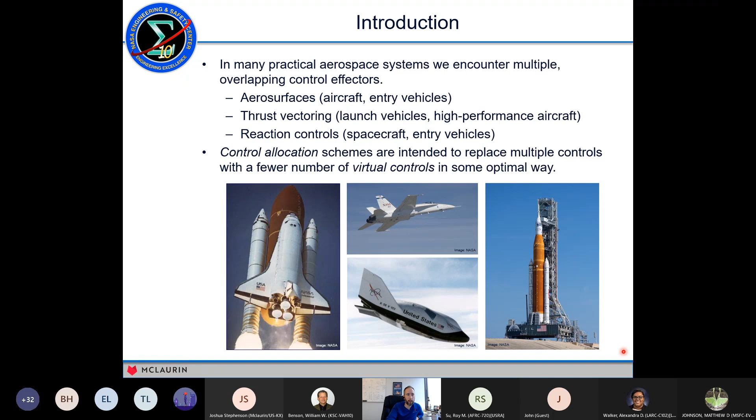Okay, so I think everyone should be ready and brace yourselves for a little bit of mathematics here. Part of the intent of this talk is to focus on the underlying mathematics, not necessarily the algorithmic formulations and how you solve these optimization problems, but more how the problems are structured and what they are from a mathematics and geometry and topology standpoint. So let's talk about, in a simplified way, what are we trying to do?

Okay, so if we represent the vehicle dynamics as some basic nonlinear, non-autonomous set of differential equations, and there's some state vector and some output vector, we'll assume for the purposes of this example that the state vector and the output vector are the same size. And a lot of the problems we'll look at for aircraft, I'll linearize the aircraft dynamics or linearize the rocket dynamics. That's pretty typical. So the structure of the problem and the control design part of the problem in terms of stability theory and control law synthesis is really not what we're too interested in here. So what F contains, what H contains are not that important.

Really, what we're going to boil this down to is a linear algebra problem. And then once we've solved the control allocation problem, that simplifies the design for the subsequent control design problem. And the control design problem is not what will be in the scope of the discussion today.

So if we just simplify this system down to some either linearization or perturbations around some nominal point, some nominal control position, we can linearize the sensitivity of the system dynamics with respect to changes in the input variable. The input variable here is u, and this u is just a vector of dimension m that will contain the control deflections. All right, so we are restricting the problem here to situations where the response of the dynamical system to the control changes is linear in those changes.

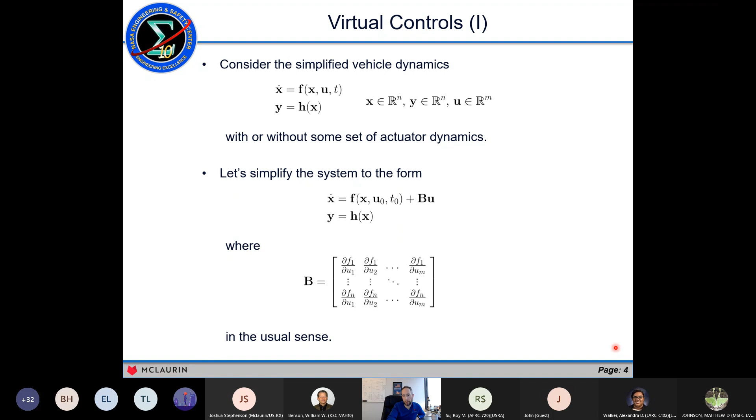But to introduce the basic geometry and the restrictions on the problem, we'll just assume that the system is linear in the controls. All right, so this is kind of the B matrix that you see in the usual sense if you have an x dot equals Ax plus Bu, as you would in a typical linear control synthesis problem. Okay. All right, so we're going to call that the input sensitivity matrix, or it's just a matrix of partial derivatives of the response of the state derivatives with respect to changes in the input.

Right. So what that does is we can think about it as a linear map. It's a linear transformation. It maps the actual controls u onto some controlled degrees of freedom. Those controlled degrees of freedom could be the angular accelerations. They could be both lateral and angular accelerations, or they could be some other intermediate control variables. What variables those are is not that important. The key is that B is typically not square.

All right, so in a typical, say, aircraft or spacecraft control problem or rocket control problem, the number of control degrees of freedom given by N is typically 2 or 3, like pitch, yaw, and roll. And M is the number of degrees of freedom of the effectors. All right, so in order to proceed with the synthesis technique, whatever technique we're using for control design, we want to replace Bu with some virtual control. We'll call it V. And I'll try not to abuse the notation too much.

There's been some changes in notation from the aircraft world to the thrust vector world and so on. But generally what we'll have is the control deflections or the control input vector is going to be called U, and the virtual control will be called V. All right, and what we're doing here is essentially squaring up the system. Now, for those with a controls background, you'll see here that I don't have a direct feedthrough term here, meaning the relative degree of the system is at least 1.

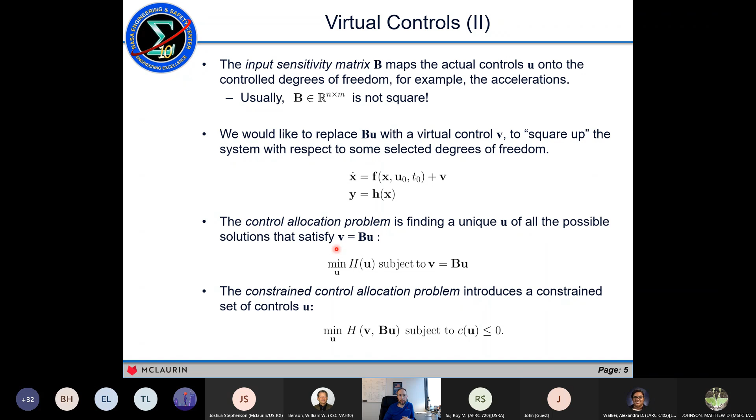Okay, so really when we look at the unconstrained problem, this is just a linear inverse problem. It is a simple linear algebra problem. Now, it turns out that because of the constraints, it becomes a relatively complex problem with a lot of caveats and implications of different solution methods, and it has yielded a really rich literature.

Okay, so why do we do control allocation rather than broad MIMO synthesis in the controls world? Well, it eliminates redundant degrees of freedom. It simplifies our design problem considerably. So while we could use MIMO techniques, if we have a system that has particularly complicated structural dynamics, for example, it is then still possible to look at single loop stability criteria using the Nyquist criterion. So we can still apply all of those linear stability techniques that are very common for flight certification.

A lot of practical and classical control laws break the system into 3 degrees of freedom, like roll, pitch, and yaw, that are either uncoupled or have some limited cross coupling, like roll-yaw interconnects. And also, as I mentioned earlier, it would not be reasonable if you have an agile fighter aircraft, for example, with 16 control effectors, to put 16 control inceptors in the cockpit. Pilots are used to operating on 3 degrees of freedom, so we have to have some way to map those 3 degrees of freedom into optimal combinations of the individual control effectors, whatever those optimal combinations are.

All right. So as I mentioned, it's straightforward to solve this problem if the moments or accelerations, the virtual controls, are linear in the control deflections, and the controls are unconstrained. And even if they are constrained, if the constraints are geometrically simple, okay, so a very simple constraint function, and I'll get into the geometry of this in just a minute, is just that the absolute deflection of the controls cannot exceed some value.

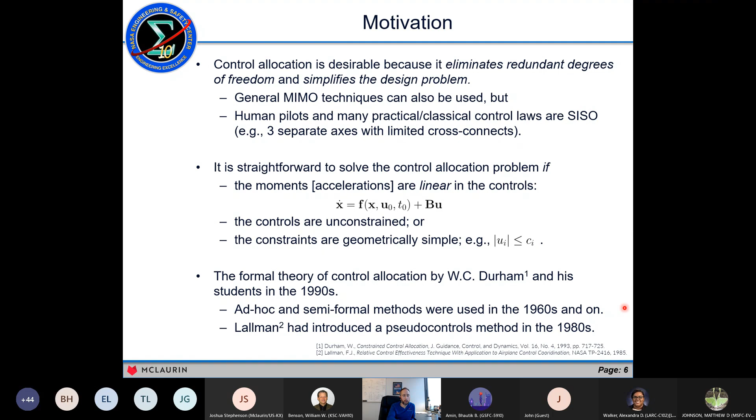All right, so if we get a little bit out of the very general dynamical system description that we used earlier, and say we have just linear perturbations from some operating condition, an angular rate, dynamic pressure, Mach number, alpha, beta, and some control positions. And in the HARV example, the B matrix maps control deflections into normalized aero coefficients. Right, so these are your CM, CY type aero coefficients, and then we can go look at what this looks like geometrically.

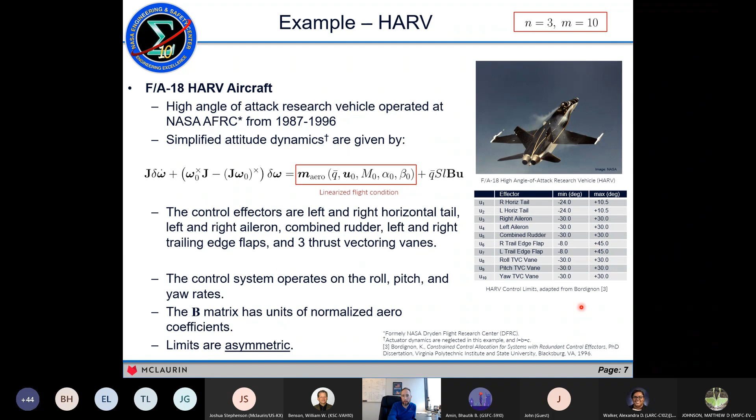Now, the way this was actually implemented in the LM flight software was with a whole set of different firing tables based on different failure conditions and jet select modes and so on. But for the purposes of discussion, we can solve this problem using a control allocation technique. So we'll use that as an example here in just a few minutes. All right, NASA SLS, which I'm proud to say we flew these algorithms just a few weeks ago, November 16th.

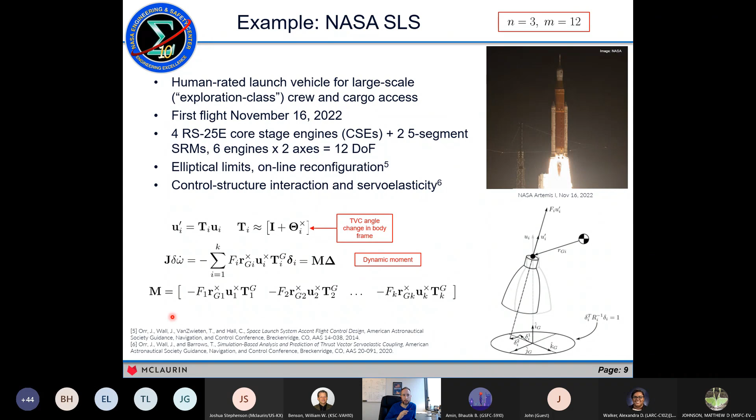What we'll end up doing is inverting M, this matrix, which maps the effector, the TVC deflections, into torques. We'll invert J, the inertia tensor, we'll pre-multiply by M, and we'll end up with the same matrix B. So if we write M, we're typically talking about torques, and if we write B, we're talking about angular accelerations. But again, that's just a particular structure of the problem. All of these techniques apply for arbitrary pseudo controls, whether we're talking about rockets or spacecraft or UAS, quadcopters. It's the same theory underlying.

All right, so what is control allocation algorithmically? Given a desired virtual control, we need to find a U that's optimal. I introduced this just a minute ago. So this is the unconstrained problem. So it does simplify the design problem. There's usually 3 controlled degrees of freedom. And if the solution is unconstrained, there's always a solution for an arbitrary V if B is full rank.

Okay, so if B can generate moments in any direction, all of its column vectors, some will be linearly dependent, but if we have a minimum of 3 independent column vectors, then I can always generate moments in any direction. Cases for which that's not true, we call a degenerate geometry or a degenerate control allocation matrix. And there are ways to deal with that. And those can happen, for example, if you lose control effectors. But we won't address that in detail here. Again, that solution is not unique.

All right, so what does it look like from an autopilot standpoint? I have what would be typically called a plant model, which is my controlled system. I have some vehicle dynamics in here. I have a sensor that senses some controlled degrees of freedom. In this example, it's just angular rates. So this is like a rate feedback autopilot.

And I have a whole bunch of actuators. So I'm not ignoring the actuator dynamics. These are very much in here and they're very much part of the analysis. But what my control law does is it generates a requested, say, angular acceleration. And then it's up to my control allocator to decide how to convert that into actuator commands that will achieve that angular acceleration in some optimal way.

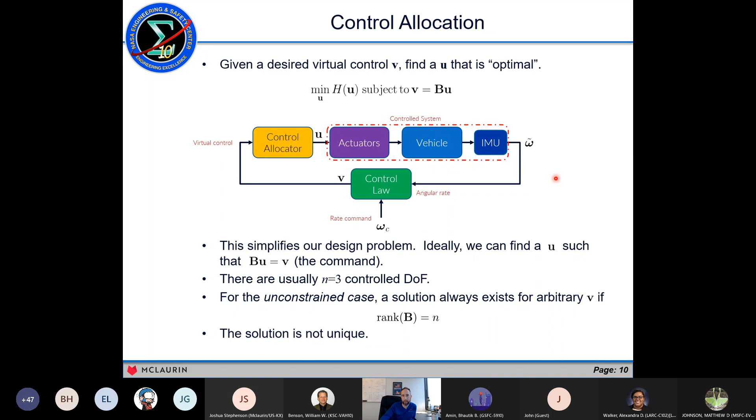All right, so the most common way to go about this problem is using what's called a pseudo-inverse solution. This is kind of the intuitive way. It's not always the best way, but it's very common for a variety of reasons. If the set of controls is unconstrained, we can use a pseudo-inverse. This is a linear least squares solution. It does not have any knowledge of the constraints.

Now, is this a good idea? Is this necessarily the only answer? No, because there are many more things that I need to be concerned about with U to make sure that I don't just get the command I asked for, but I also do that in some optimal way.

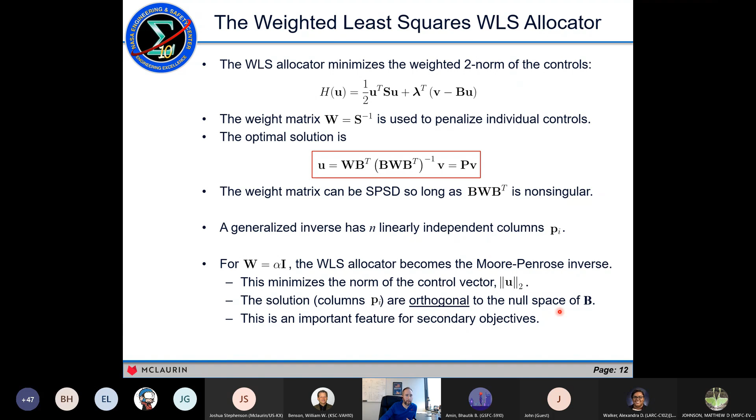But the thing to keep in mind is that in that case, and only in that case, the columns of the allocator, meaning what are the directions in the control space that are allocated, are orthogonal to the null space of B. And that means they don't generate any internal loads. All right, that's an important feature, and we'll talk in just a second about what that means.

One great way to look at that, this is for a very simple case. This is a Titan II GLV, which has 3 controlled degrees of freedom, but 4 actuator degrees of freedom. We can actually visualize exactly what those control vectors are. So if we just do a straight pseudo-inverse solution, what we will find is that we get 3 column vectors in that pseudo-inverse. 1 corresponding to differential motion of the engines for roll, 1 corresponding to symmetric pitch motion of the engines for pitch, 1 corresponding to symmetric yaw motion of the engines for yaw.

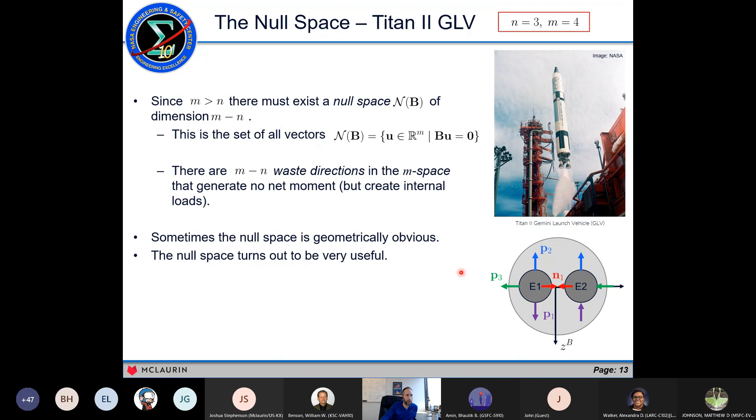Now there is a fourth direction in this space of dimension 4 that is in the null space of the B matrix, and it is inboard outboard motion of the engines. So in terms of mapping into angular accelerations, if I deflect the engines inboard or outboard towards one another, I don't generate any net moment. And that is a solution where B times U for any scalar multiple of that vector is equal to 0. That's the definition of the null space. Now it turns out the null space is pretty useful.

All right, so there's always 2M inequalities, and this forms a thing that is called a polytope. Now it's convex, it's closed and bounded, and the neat thing about linear transformations is if I have a closed and bounded convex set in a space of dimension M, and I multiply it by B, or it's transformed by B, it maps into a closed and bounded convex set in an n-dimensional space, and that's the, say, 3-dimensional space of angular accelerations.

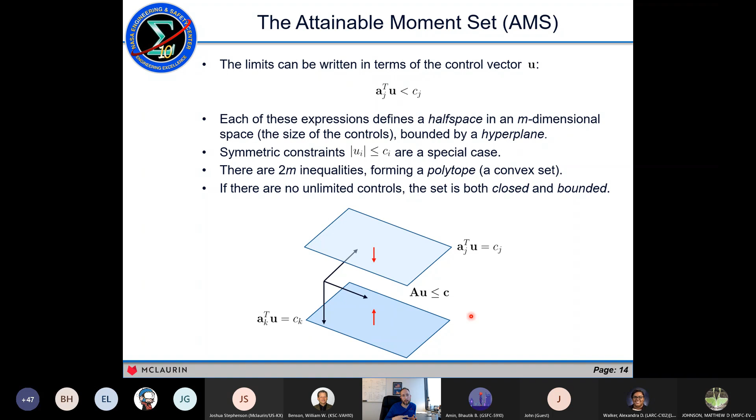All right, so the set of all possible controls generally we refer to as omega, and this is an example with a linear inequality constraint, just AU less than or equal to C. It's called the admissible set. It's the set of all possible controls. It has an image in 3-dimensional space or n-dimensional space that is preserved. This boundary is preserved. Some of it is projected inside, but some of it gets projected into this exterior boundary.

Okay, this set is called the attainable moment set, and this is very important in control allocation theory. It represents the extents of what a given set of controls can do subject to the constraints. That is a theoretical upper bound. And a very important relationship from control allocation theory is that it's actually very difficult to achieve all this. Using most simple algorithms, you can usually only get part of it. You can't get all of it.

But the idea is that any point in or on this boundary, this is say in angular acceleration, there must be theoretically some point over here that satisfies the constraints and generates that moment. Now, whether I can get it online with an algorithm is a different issue.

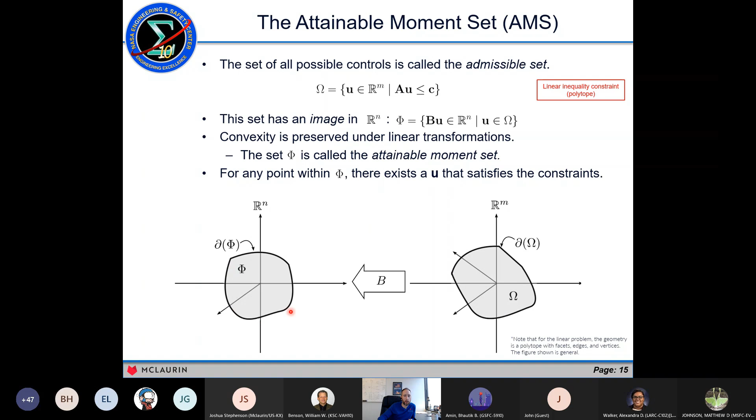It turns out that it can be recast as a linear program and solved online using a simplex algorithm. Simplex is a very simple algorithmic technique used to solve LPs. It works very well. It's one of the only algorithms that guarantees that you can access all of the theoretical capability. Unfortunately, it's not very efficient because it turns out that most of this boundary is intersected with the null space. So while you can achieve the exterior limits of the attainable moment set, you're actually wasting a lot of control power in its interior, which is not necessarily efficient.

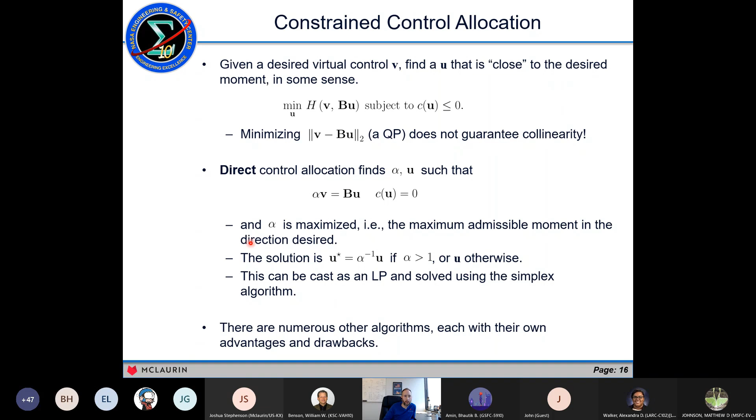There are many other algorithms for doing this. They all have their own advantages and drawbacks, and unfortunately, we don't have time today to go into a lot of them. All right, so why not just use weighted least squares for everything? Okay, this is a key result in control allocation theory. It's universal, it's very important, and it's very counterintuitive. It was originally proved in the early 1990s by Durham. A generalized inverse cannot access all of the moments.

So if I look at, say, what is the control capability of a set of vectored engines, and I map that over here, I look at the image of the attainable moment. So what is the angular acceleration contribution of each of these guys? And I map them into 3-dimensional space, I will get this thing called the attainable moment set, which is the total capability. If I then use any linear inverse to allocate those controls, I'm confined to what is called a proper subset. So there will always be part of this space in 3-dimensional space that I cannot access without changing the direction in a nonlinear way.

So a linear control allocator or a pseudo-inverse solution has many advantages in terms of things like structural loads and being able to control the null space and things like that. But there's always part of the system that I cannot access.

This is very important. This example over here on the right is a trivial example that I constructed where the B matrix is basically just a couple of ones, and it's 3 controls into 2 objectives. So we're mapping a 3-dimensional cube with limits plus and minus 1 onto a plane. And as you can see, if you look at what the pseudo-inverse does and just kind of turn your head just right, you can see this is actually just a projection of a 3D cube into a 2D space.

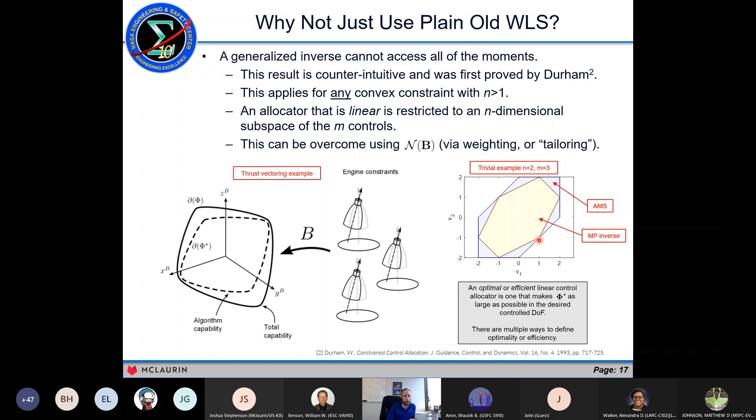theoretically available. All right, so here's an example using the classic HARV case. Okay, linearization. This is right out of one of the most popular control allocation examples in the literature. 10,000 feet, Mach 0.3, relatively high alpha, no side slip. So everything's nice and symmetric down the longitudinal plane. This is the moment matrix. It's a 3x10 matrix.

And if we apply these limits and we look at what the shape of the attainable moment set is, you see it has this nice symmetric shape. All right. If we use a straight Moore-Penrose inverse, we only access 13% of the total volume.

So even getting deep into the theory, a takeaway even at the system engineering level is if the design doesn't close, the first question to ask is, are the controls being allocated effectively? Because sometimes ganging approaches or pseudo controls approaches are very simple, Moore-Penrose inverse, least squares. This is not readily apparent unless you go do the analysis. And so sometimes there's hidden capability in the system that can be eked out using nonlinear approaches.

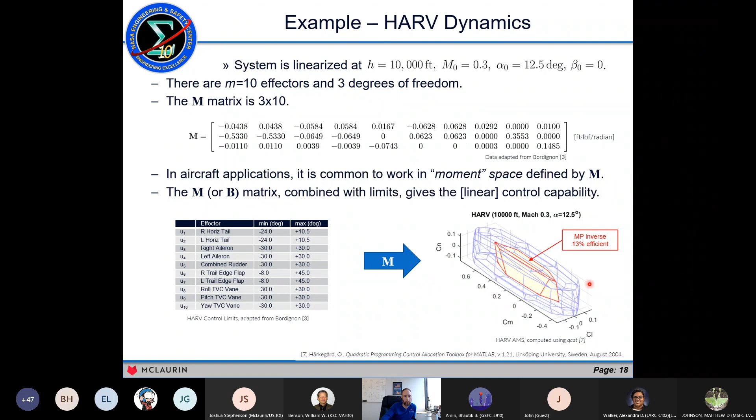All right, let's look at what this looks like in a spacecraft situation. This is, again, the Apollo LM, a very specific configuration for which I have data. It's Apollo 12 pre-PDI. So usually the way we can handle control allocation for RCS is, since we're confined to just turning the jet on and off, we actually convert this to a problem in time. And we use exactly the same algorithm, same mathematics to solve for this in time.

So we just multiply the angular acceleration by some base frame rate. In the case of the production LM, this was 100 milliseconds, autopilot executing at 10 hertz. And so now we convert the problem from an angular acceleration problem into a rate increment problem. So we have, from the autopilot or from the pilot interface, a commanded rate increment. Over here on the right-hand side, we have the jet location, the nominal jet force, and the jet unit vector A. And the control vector then becomes a vector of on times.

And so at each minor frame cycle, we then send delta on time commands to a jet controller, which will provide a pulse of the desired on time to each jet. And there are various ways to handle the minimum on time issue. If the jet firing command is below the minimum on time, we may not fire at all. We may scale the times to account for the fact that at very low on-time commands, the jet response is not a pulse, not a square wave.

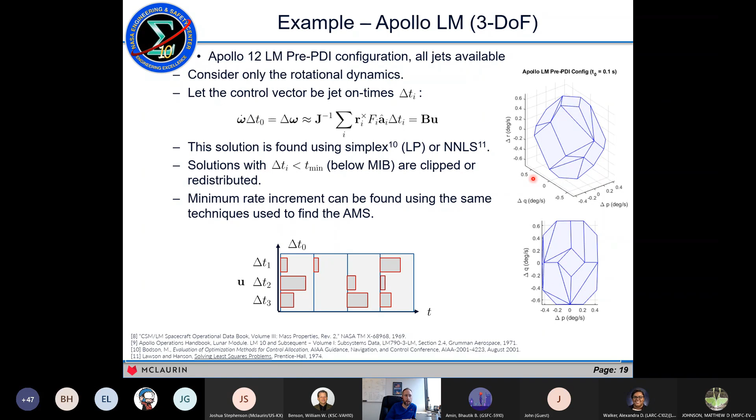The same techniques can be applied for certain selections of jets to determine what the minimum rate increment is, and that helps for jet sizing. So if you were to imagine that being plotted, it would be a very small minimum increment here in the interior of this domain. And that helps us do things like size what the limit cycle amplitude is going to be with a given jet size.

Okay, last example, space launch system. Space launch system used a relatively sophisticated online weighted least squares allocator. It's exactly the same expression that I showed you earlier that we derived just using a convex objective function and a Lagrange multiplier.

The weighting is optimized to maximize the pitch yaw authority. Okay, it's computed online, and that allows the system to be able to accommodate in real time things like an engine out that's notified. The engine controller says, "Hey, I'm shutting down this engine." We can say, "Okay, well, I can't get any thrust out of that engine anymore. I can't vector that engine anymore, so I'm going to take it out of the solution." And that's done with no net change in the forward control gain. So the stability margins remain the same within reason. This is really, really neat for analysis.

Okay. Fundamentally, the constraints here are circular or elliptical in the general case. And so the geometry is a little different than we have in the aircraft problem. And you can actually define this as what's called a QCQP, or a quadratically constrained quadratic program. But we don't solve it as a QCQP because a QCQP is iterative. The solutions are not necessarily guaranteed to be smooth in the input parameters, right? So as I change the command, I could get different solutions. And linearity is required, at least in the interior, for control structure analysis.

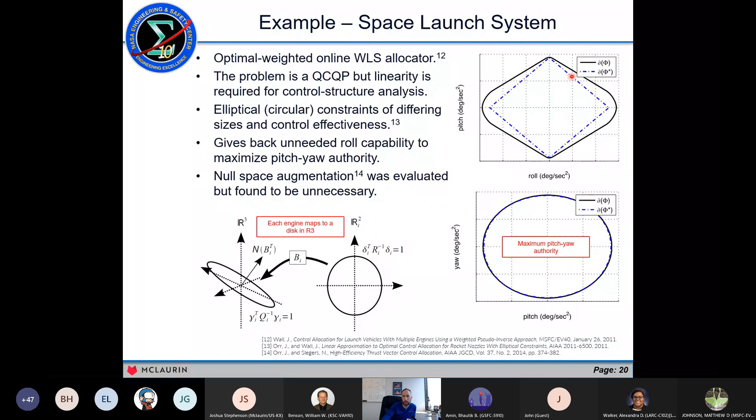And so what we're looking at here is projection of pitch and roll, and pitch and yaw. And so what you see is we achieve the theoretical maximum possible pitch and yaw authority when we don't have a roll command. And as we go up into the higher roll commands, we give up just a little bit of the pitch and yaw authority over the theoretical maximum. And so that's a very intentional design choice. And that's kind of a common weighting for a rocket system.

All right, so some more advanced topics. We don't have a lot of time to go in. This is just one slide on this. I mentioned that the weighted least squares allocator does not address saturation, and it does not directly address rate limiting. And the issue here is that if you get to the boundary, you say I saturate one of my aero surfaces, or I saturate one elevon, and so the actuator controller says I'm not going to command it any further, and it just holds a position, and all the other actuators continue to move.

Well, what has that done? The vector in the m-dimensional space that contains U has changed direction, which means that V is no longer equal to BU. BP is no longer equal to I, and I get cross-axis coupling, right? So that shows up as a cross-axis coupled response in the control.

Not immensely elegant, but we just find a scale factor that scales the entire command to keep the response in the boundary. And that way you give up a little bit of authority, but you're able to maintain collinearity of the response and the command. And this tends to work really well in applications. The other thing you can do is you can divide the control allocation problem into many smaller control allocation problems over the maximum deflection that a control effector could move in a single time step and actually get rate limiting.

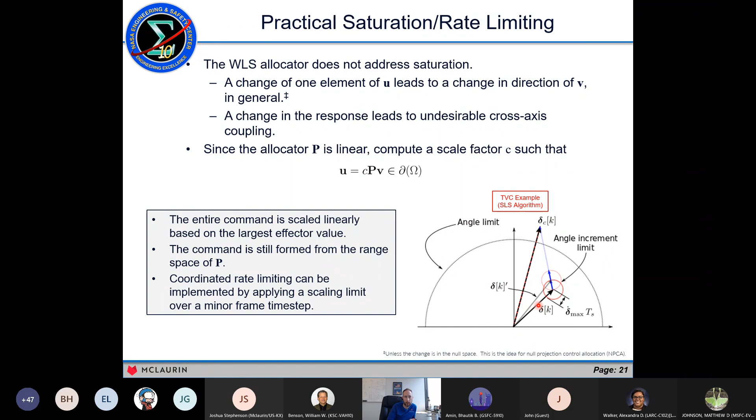And so again, SLS is an example. It's a non-trivial geometry because they're all circular. But what we're able to do is do what's called coordinated rate limiting, where in the event that a single actuator saturates in rate, we actually scale back the rates of all the other actuators so that we get a coordinated response. Everything stays in the range space of the allocator, and we don't get undesirable cross-axis coupling. And this works really well in practice.

All right. So that's a lot of information, a lot of theory in a very short amount of time. But what I want to summarize, I haven't, of course, gone into the huge diversity of control allocation algorithms. Null space projection, null space augmentation, cascaded generalized inverses, sometimes called CGI, or redistributed pseudo inverses are very popular. There are various ways to construct the weight matrices to do things like handle uncertainty in aerodynamic coefficients. So there's a rich literature out there of things that can be done very intelligently with control allocation.

Daisy chaining for handling diverse types of control effectors sometimes is a dangerous thing to do. Sometimes it works really well. This is going to continue to be a rich topic for emerging aerospace systems. So all the examples that we looked at today, plus of course, over-actuated electric aircraft that have many separate propulsive devices that can be individually commanded, unmanned aircraft systems, tailless aircraft, novel spacecraft designs that combine wheels and control moment gyros, for example. All of these techniques can be applied to those systems.

And also control of multiple objectives like structural loads and drag. There's a lot of work in drag minimization control for cruise using control allocation. All right. There are, again, many algorithms. Some have somewhat dangerous caveats. Some are intuitive, some are non-intuitive, some are very elegant, but difficult to implement computationally.